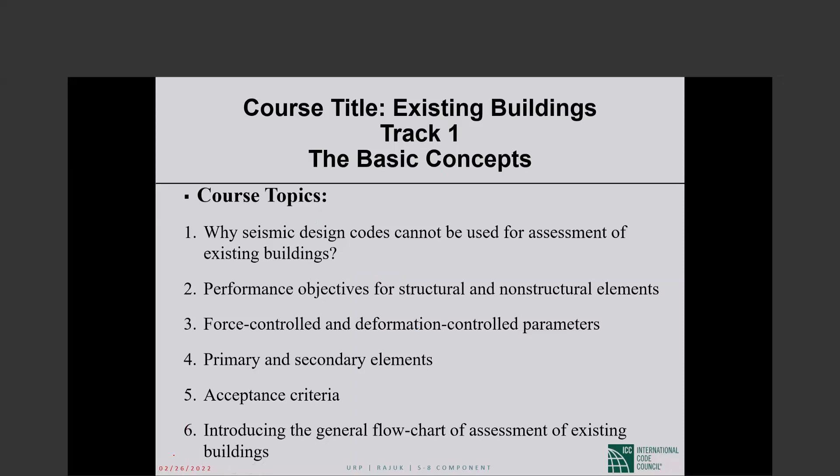First of all, again, I'm sorry that I will spend some of your time on material that all of you know. But as I said, it is very critical for us to find where exactly seismic design is separating from seismic evaluation. And then based on that, we can make our methodology for the evaluation and later for the retrofitting.

So if we look at the procedure for design of a building, what that means for us, or what we do in designing the building. Usually there are many elements in a building. We classify those members into load-bearing elements. Some of the load-bearing elements carry the gravity loads, vertical loads, some lateral loads. So these are the main point for us in design, designing these load-carrying elements.

Also, there are other elements in the building that we don't really depend on to carry the vertical or lateral load of the building. If they can carry the vertical and lateral load of themselves and be anchored, that is good enough for us. So in the design, mainly we look at the load-bearing elements. That's our main duty.

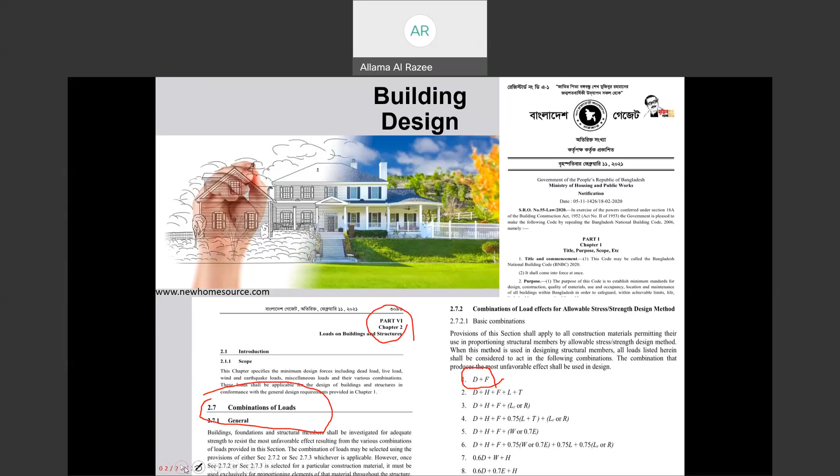Therefore, now that we have calculated the demands, now we want to design. What exactly do we design? When we say design this building, what is the design? What item are we designing? As I mentioned, in that specific beam, there are different response parameters and different force deformation.

For example, for the axial load, for the shear in the beam, for the bending moment, for torsions, we have the values of the load, the behavior that we want from each of these response parameters in building structural design. I emphasize building structural design because later I want to go through building seismic design.

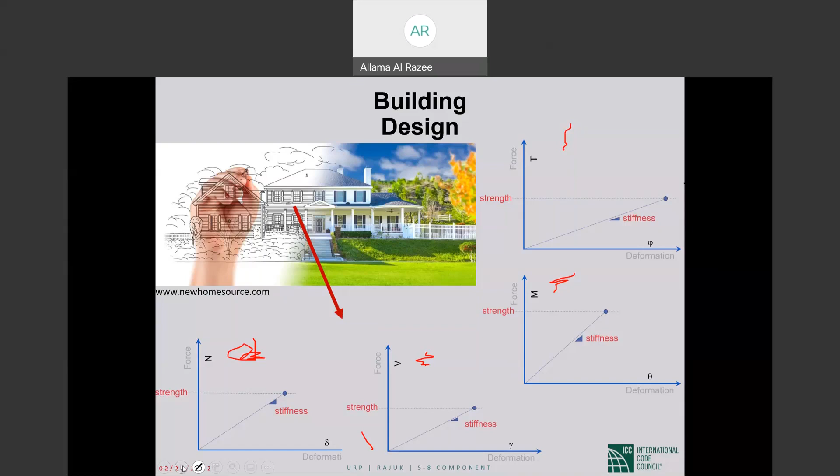Therefore, all our design focuses on how to provide a specific strength. So to conclude this part, in building structural design, we design for strength, or we design for force, because it's the vertical axis. And as we can see, for example, in BNBC, chapter 6 says strength design of reinforced concrete structures. So it clearly says that all the articles here give you the approach for how you can design an element to have a specific strength on the vertical axis.

Therefore, the load that causes this demand is not important. So in the steel code, in the concrete code, in the chapter on design for strength, we don't say whether it is under, for example, dead load or live load; whatever load causes this much demand, we should provide enough strength that exceeds that demand. So our design for buildings that don't get damaged is designed for strength, designed for force. Our design approach is force-based design. We design for force. All these articles are for designing the strength of the elements.

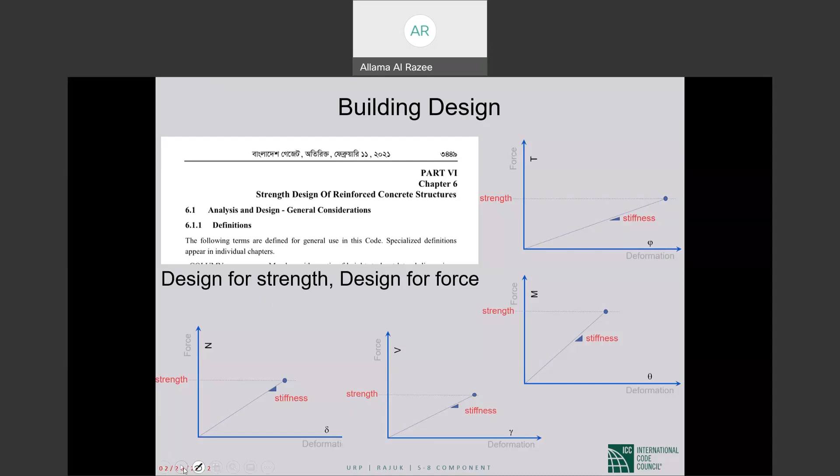Of course, as I mentioned, we design for strength and then check for stiffness. So, in a very short statement, for ordinary loads we expect the building before loading and after loading to remain the same, because the designer calculates the demands in all elements very precisely, and we have good codes so that for each element, each response parameter in that element can be designed in such a way that the capacity, the strength of the response parameter, is more than the applied demand.

So in all the design codes, again emphasizing, it is strength-based design. Okay. But if I can go to the next page.

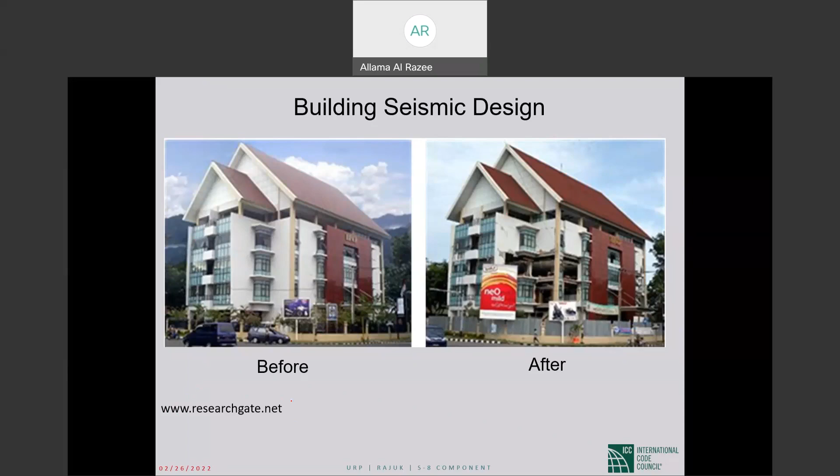And to be sure, these are referenced in the code. I know that you had courses on both the structural design part and the seismic part, but again, because I need them later, as talked about before, we have chapter 6, for example, for reinforced concrete strength design, and all the items there are for designing under ordinary loads, in a way that the building remains undamaged.

But then we have section 2.5 on earthquake loads, and then 2.5.2 earthquake resistant design, and the bad news is stated there. It says that the purpose of the earthquake resistant design provisions in the code is to provide guidelines for design and construction of new structures, still you are in new structures, subjected to earthquake ground motion in order to minimize the risk to life. Minimize, not completely avoid, as we would expect in a building that doesn't get any damage.

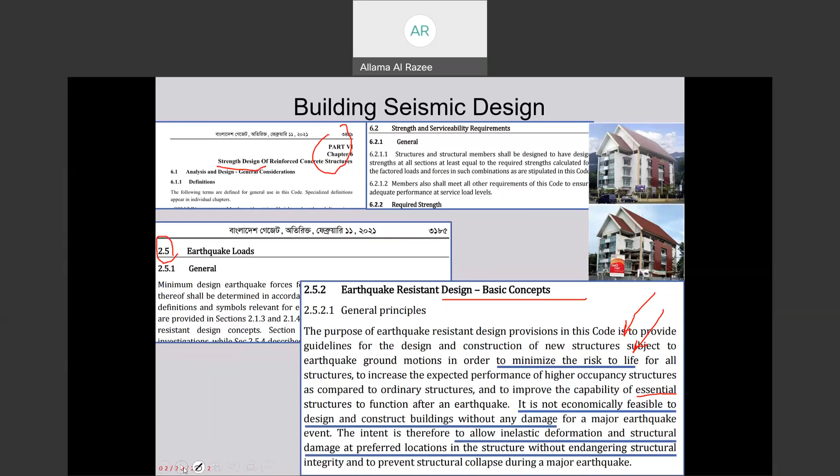So, one good thing that researchers usually do after earthquakes: because the earthquake happens, you have the earthquake ground motion record, and sometimes you have the specifications of the buildings, so you can model that and study what happened to this building.

For example, this is from a paper in a world conference assessing this 15-story building damage in one of the earthquakes in Chile in the year 2010. So a very nicely built building like this, after the earthquake, becomes this. For sure, the intent of the code is not this. The building in 2009 becoming like this in 2010 is not acceptable.

If everything is according to code, and this happens, and if the level of earthquake that happened is around the design level earthquake, then we should change something in our code. Because we accept damage, but, as it's mentioned here in the BNBC, we don't accept collapse, just damages. Integrity and also stability should remain. So these kinds of studies help us to improve the code.

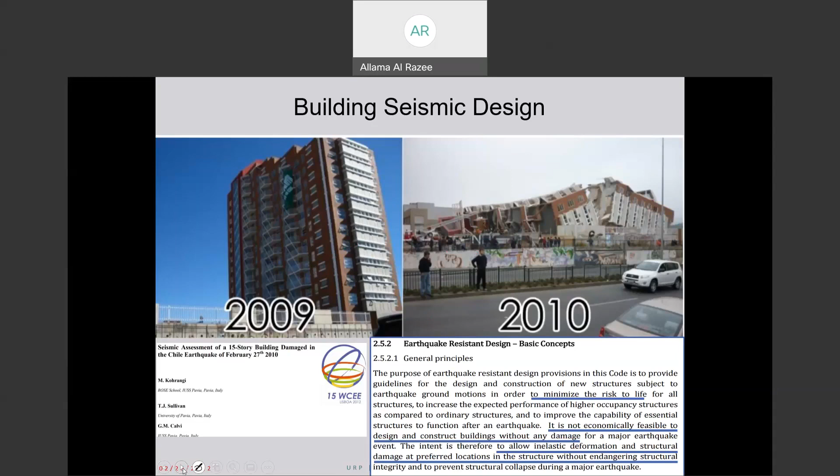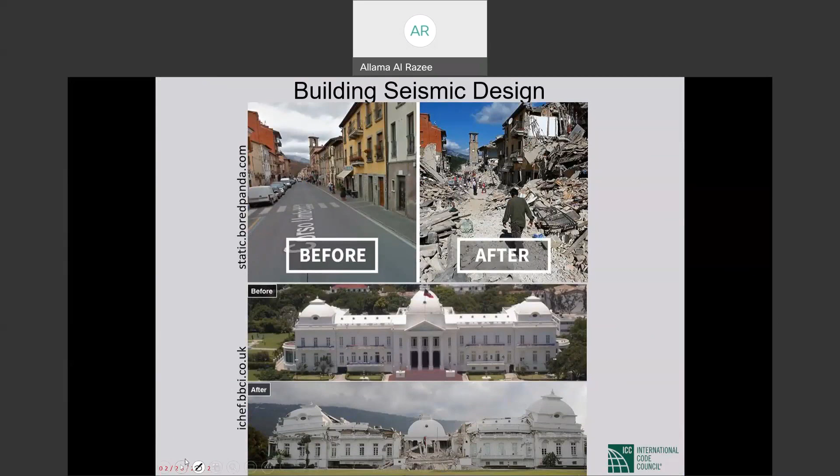But the main point is, this is not the behavior that we accept for buildings. When we say that we accept damage, we don't accept this kind of damage. Another example: here, again, these are not according to the code. Or if it is shown that they really designed them according to code, and this happened, then we look at the level of earthquake. If it is around the design level, then our design articles, approach and requirements need some modification. We don't accept losing stability or integrity.

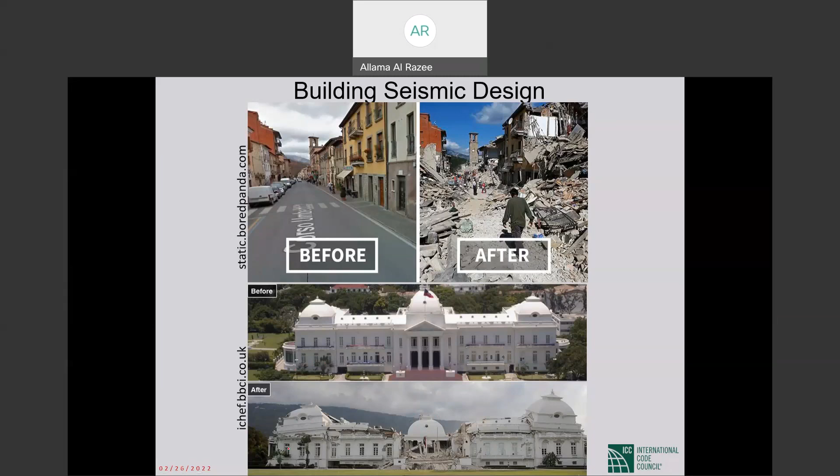Here, for example, in the bottom picture, the middle part, where the irregularity was more compared to the other part, got most of the damage. So we don't expect this much damage. It is not according to code, and if it is, the code needs changing the requirement. This one is also not the way that we accept as the intention of the code.

Usually in the previous versions of code, the penalty for irregularity was only a change of the method of modeling and analysis. Therefore, if you had a building with some kind of irregularity, previous codes let you go ahead, but you should use more sophisticated analytical methods. Instead of static analysis, you should do, for example, response spectrum analysis, dynamic analysis. But they don't limit you. They don't forbid you to design a building with irregularity.

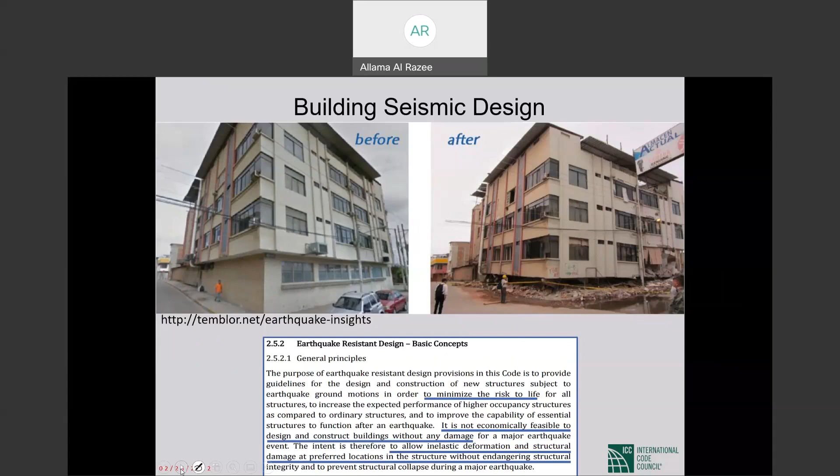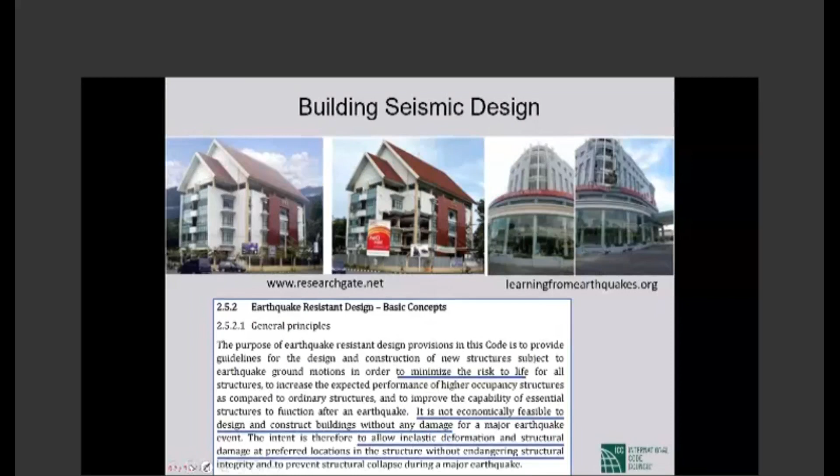Anyhow, this kind of damage, again, is not according to code. We don't accept this, and the code's intention is not like that. If this is designed with code and it does happen, it was not the intention, and they should modify the code provisions. For this building, it got damaged. There are lots of damages in the elements, and most probably this building will be demolished after this earthquake.

This one maybe can be taken care of with some retrofitting, but anyhow, these are the buildings that we, as structural experts, give to our clients. And after this earthquake, they don't believe us that we design according to code, because they thought that if the building is new and designed according to the new code, it shouldn't get damaged. But really, we are designing for damage. The way that we design, we expect this kind of damage.

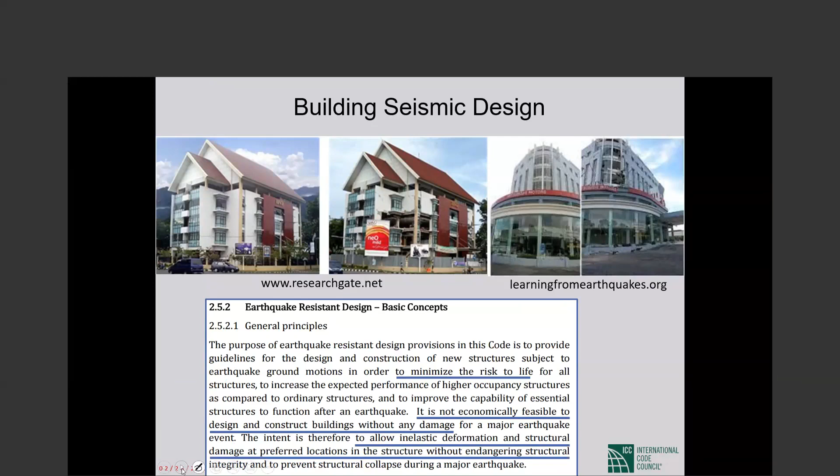So, okay, very good. Now, how can we handle this kind of very complex behavior in the new code, in our design for the new buildings? Then we can use the same approach for existing buildings. So there is really no need for an extra approach, extra code, extra course. What is the problem? Where is the problem? We should try to find the problem.

So again, the main question is, can we use the seismic design approach of the NBCC for assessment of existing buildings? We are using this approach, a very nice, very up-to-date code, for the new buildings on the left. For the new buildings, we model, we check the stress ratios. If there is a problem, we change the property of the element, solve it, and then we get the final design. No big deal, not much complicated stuff needed. And we are using such an advanced seismic design especially for these new complex buildings.

Then for existing buildings, for old ones, they should be much simpler. We shouldn't make it more complicated. But why is it that we make it so complicated for existing buildings, which are generally much simpler, older buildings compared to these new, complex, up-to-date buildings? Therefore, we should... oh, NBCC, I wrote it differently. So NBCC seismic design for assessment of a building, how it works.

How do we design for such complex behavior in this building, for example, lots of damage at different points, but it has a stable situation and its integrity almost remains? So how do we do that? Which complex software do we use to handle this kind of behavior? Where do we look at the inelastic deformation, how do we check if this inelastic deformation, which means damage, is endangering structural integrity or not?

During design, I can't see any location where we really model and check any damage, level of damage. No, everything was so simple: calculating a base shear, distributing it along the height, and using an elastic model and software, calculating the response parameters in the elements, and then we go to the code and design so that the strength is more than the demand. So where is this complex behavior that I have shown, where do we look at it?

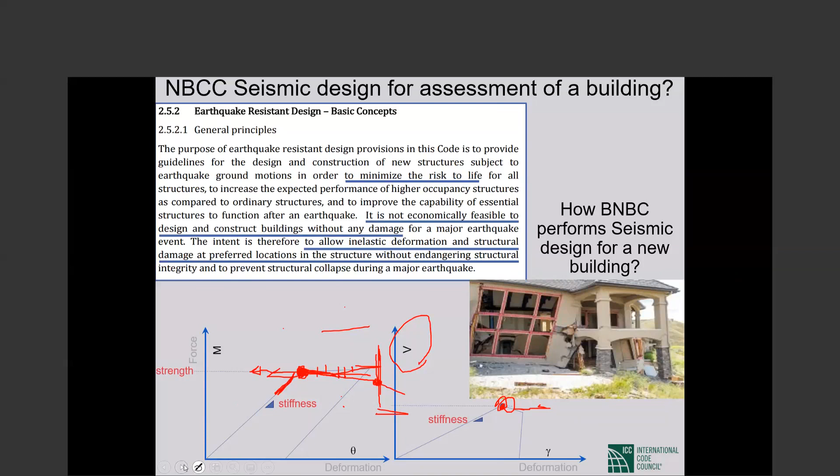see, if we want to design a new building for the earthquake, we should do nonlinear analysis, and for each response parameter see how much damage it gets and whether it is acceptable or not. But we don't do that. Without doing that, how do we design for earthquake? So that's the main point, the main parameter that we should look at more carefully to see where it causes problems when we want to apply this methodology for the existing buildings.

Go to BNBC. What do we do in the BNBC? In BNBC, we assume a level of earthquake, for example the acceleration for the earthquake with a return period of 475 years, modified by some coefficients. This acceleration multiplies by the mass. The G with the mass becomes weight. But anyhow, using Newton's second law we get the force. So everything is almost clear, a very easy approach.

We calculate the acceleration multiplied by the mass of the building, get the force that the building should withstand, and then we design the building for this. What exactly do we do? We calculate V, the base shear. We apply that in the load combination with other loads to the building. For each element, we calculate the maximum response parameter, and then we design. But when I say design, we design what? Design strength. The strength for this. And that's done.

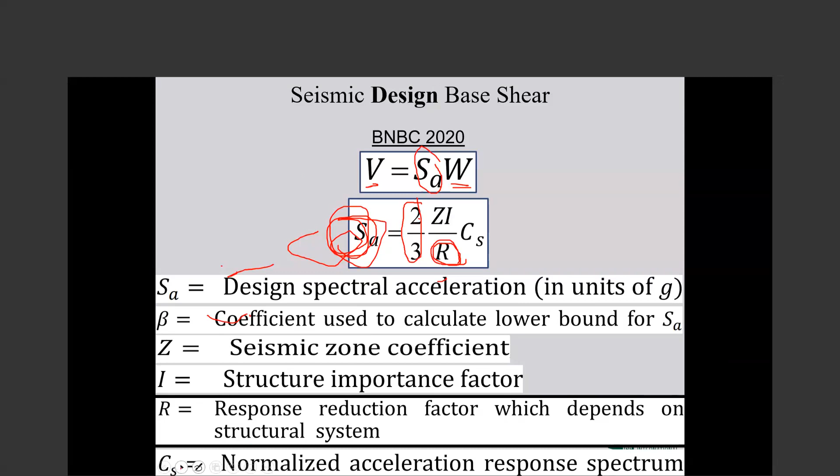We hide all the complexities in design requirements. For these R values, we calculated them based on the behavior of each lateral load system. We look at how much ductility each system has, and based on the ductility that the system can provide, we assign a specific value for R. If a system's capacity for ductility and damage before losing strength, integrity, or stability is less, we use less. And if it's more, we use more.

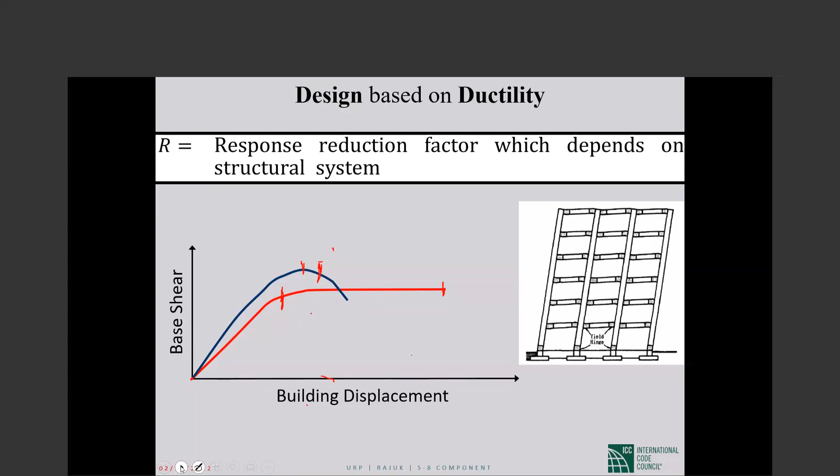So the relation between these concepts: we design for a smaller strength that we know causes damages. We know that it causes damages because we know that it is R times less than the level of the base shear for the design level earthquake. And a design level earthquake is just a 475-year return period earthquake.

It's not 1,000, 2,000, 3,000. It's just 475. So it's not a big deal. But again, even for that, we divide the base shear by R. 1/5, 1/7, 1/9, 1/10. So we reduce really drastically the amount of base shear. So we know that strength is much less than the applied load, and this gets damages.

Ductility is the capacity that with our design and detailing, we can make those damaged parts behave in such a way that they get damaged. The stiffness is zero, it is a mechanism, but it can handle some deformation, plastic deformation, without losing strength. This is the key word, without losing strength.

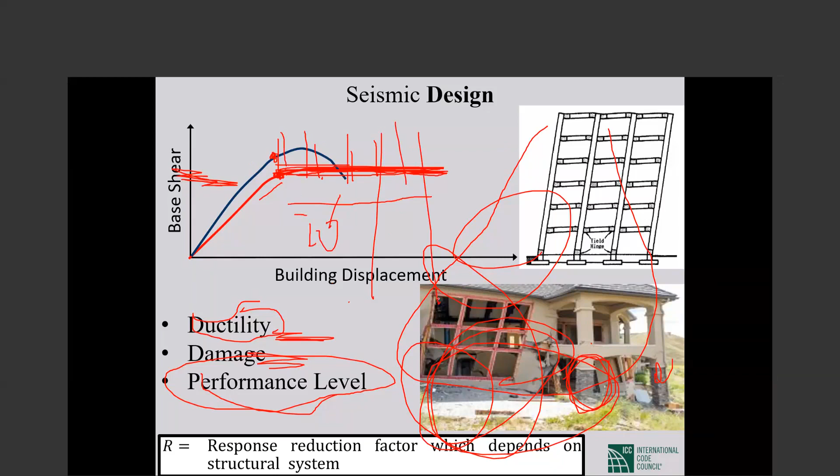So the relation between ductility, damage, and performance level is that they are directly connected and saying the same concept. So by assuming R in our formulation in BNBC, we accept that we need ductility, we will have damage, and the performance levels are not elastic performance levels anymore. The building will get damages. And this very difficult behavior is covered by design requirements, by a prescriptive design approach, and by detailing. We don't see that in the model.

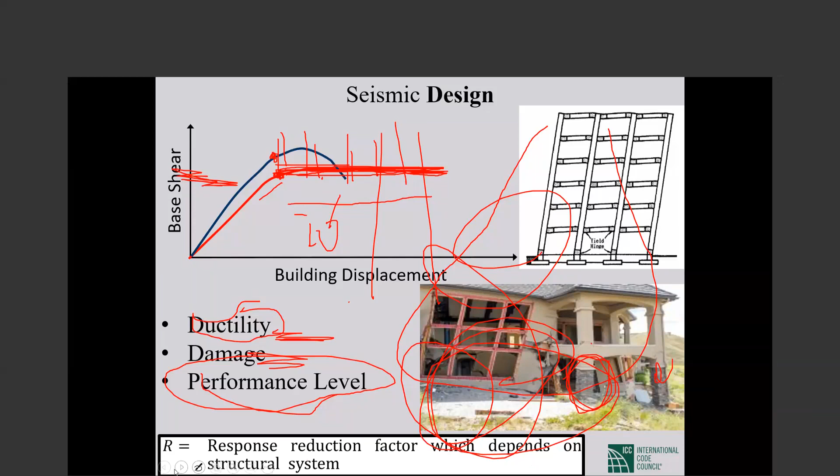And we will continue on this to reach the point that, unfortunately, for the third part, this approach is not working for existing buildings. And because of that, we need this course. Therefore, if we continue, as I mentioned, the vertical axis here is base shear, and the estimation of the base shear in the design level earthquake by BNBC is this value. That a 475-year return period earthquake will impose this much base shear.

But we can't build the buildings for this much, because for buildings in earthquake-prone zones, usually this value is too much. So it becomes very strong, very heavy, very costly buildings. So very easily we accept damage. In the calculation, we say, okay, put for this level of strength this much, or this much, for R1 or R2. But we know the consequences.

If you design it for R1, you should provide this much ductility capacity in the building. But if we consider that for all cases this is the level of deformation in buildings, which for many buildings is true, then if you design for R2, you should pay for it with much more detailing, because now the building has very small strength and very easily gets damaged. And you should provide lots of capacity in these points that get damaged.

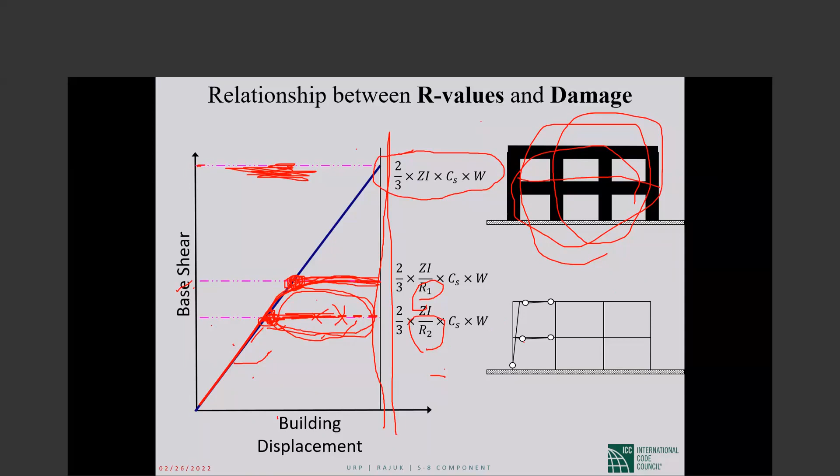It's not possible. Unfortunately, it's not possible. We need this course because there we didn't go through difficulty. We provide detailings that keep us out of the difficulties. All those non-linear behaviors here, we never see them in our design. Where are they? In that requirement.

Put, for example, the transverse reinforcement this way, the length between reinforcement like this around the column, the number of reinforcement should be like this. Many details, and all those details keep the difficulty and complexity away and handle those unwanted behaviors, especially local behaviors, that can happen and ruin our scenario.

So a very nice scenario. Depending on with what depth you can provide the detailing, you can have a larger R. If you can't impose this detailing on this site, you ask your designer to use a smaller R, because then you don't need that much ductility capacity. Therefore, that's the main point in our approach for new buildings.

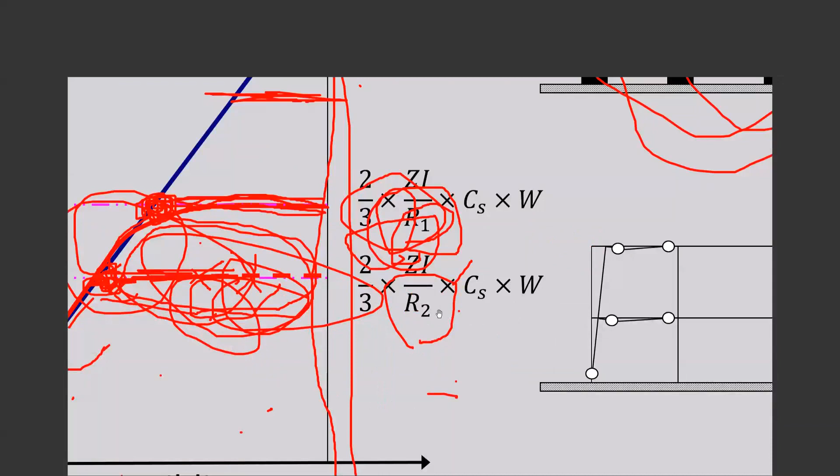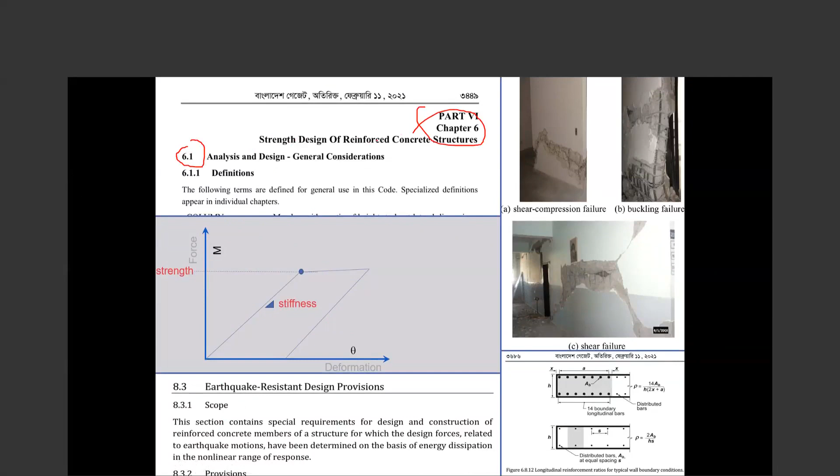What is this? Okay. That was in fact a very good thing. So, as a sample, if we want to check where those difficulties and complexities are high, in chapter 6 in general. No, sorry. Chapter 6 was strength design. Where are those complexities here? 8.3. Yeah, 8.3, earthquake resistant design provisions.

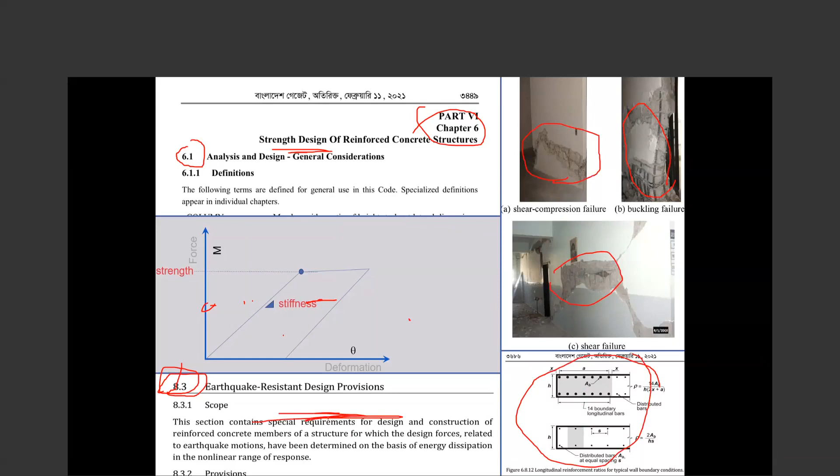Here you see detailings, lots of details. This building with shear walls that we are designing so nicely, simple, elastic, in SAP, in ETABS, very easily. We expect such a complicated behavior during earthquakes, but we don't model this behavior. We just use this detailing, these provisions in what we can call the ductility-providing chapters. You see, here it says earthquake resistant design.

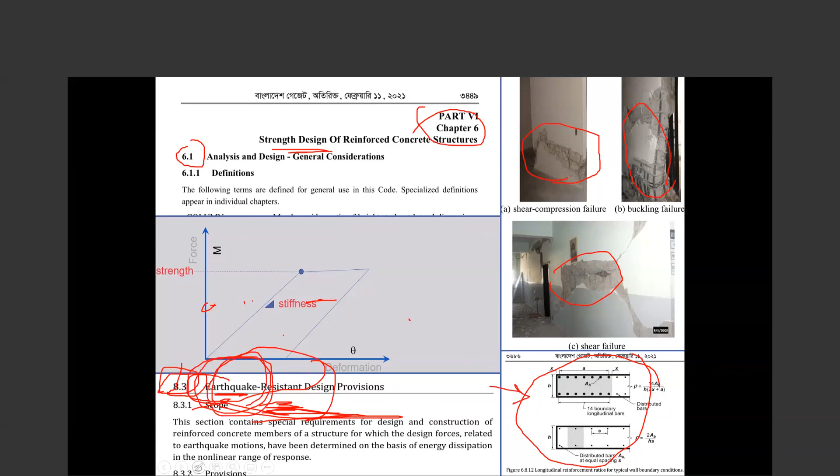The name of the loading is here. In the design code, we shouldn't name the load. What is the difference whether axial load is from dead load or from live load? We want to design this much strength. But here, we don't want strength. We want ductility. Therefore, for this specific loading that wants ductility, you don't check it in the modeling and analysis; by just applying them, you get the acceptance.

Therefore, to summarize, our earthquake resistant design for new buildings is two parts. One part is simple modeling and analysis. This is part one. Very easy, simple, elastic, linear. We put the load divided by R as a base shear and design the strengths. We know everything that we get is wrong. We know that is not the displacement, because the real displacement in the earthquake is more. Because of that, we always multiply the displacement we get from SAP or ETABS based on the system we are using.

But we are putting a smaller strength in the elements. We know that it causes damage. The second part, taking care of this damage, is not in modeling and analysis. We could ask that everybody who wants to design a building for earthquake should use nonlinear analysis, because the behavior of a building in an earthquake is nonlinear and gets damaged. So you should model the building completely nonlinear and check that none of the response parameters in any of the elements passes the ductility limit of that element.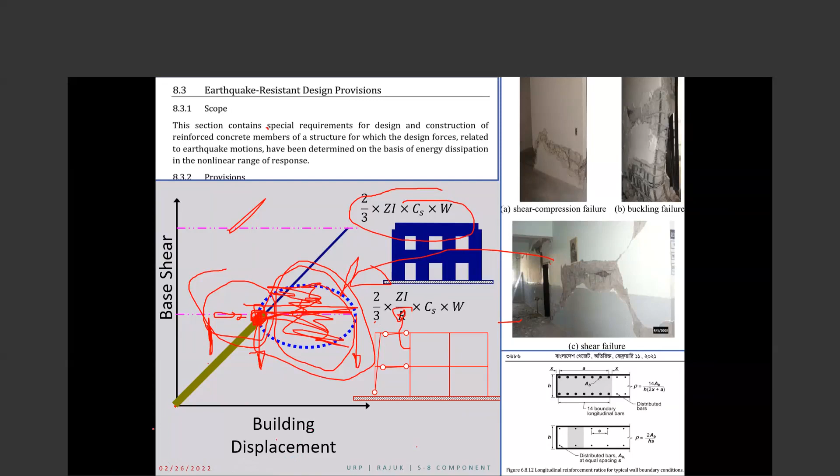That's true. Okay, so to summarize, the way that we design new buildings is with very easy approaches for the modeling and analysis. And then we have the...

Okay, let me, I have a message. We still have... oh, perfect. Very nice of Mr. Rudra. Yes, please give me feedback, because I put a system in front of me just to check my voice, and it disconnected. Perfect.

So, to give the general approach, very simple: in BNBC, we estimate the base shear. For design of existing buildings, tomorrow we will discuss how we calculate the base shear. Much simpler than BNBC. It's a couple of coefficients, and then again, Newton's second law, the same as here. Here, the coefficients seem much more difficult than there. So again, we do the same thing.

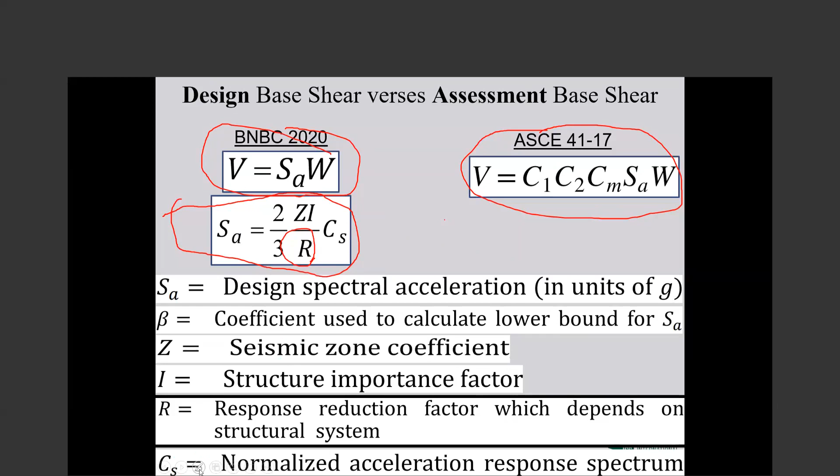I should also remind that when we say evaluation or assessment of the existing building, it's not always a very difficult job. All of you experienced structural engineers, you have lots of experience. You just go to a building, a concrete building, a masonry building, steel buildings. You can find many deficiencies and provide some detailing or advice to increase the seismic behavior of that building.

The easiest is just trying to reduce the weight of the building. Some of the floors, some of the slabs, some of the partitions. If you can reduce the weight, it will be reduced. So the evaluation and assessment of existing buildings is not always difficult. Just when we say the systematic way, it is more difficult. Otherwise, we have many methods.

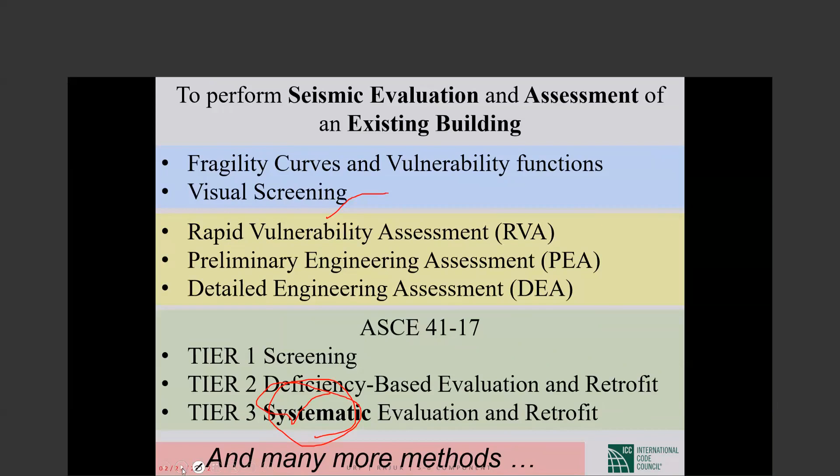That's the systematic evaluation. So when I say systematic evaluation, I repeat, I mean this: that we want to check the performance of the building at different levels of earthquake, and come up with the result that it can pass the requirement of that performance level. This needs modeling.

Therefore, when it comes to earthquake consideration for buildings, we have a long history of codes and standards for new buildings, such as BNBC. Very up to date, very good. For existing buildings, it is during these 10 years that it has mostly become, as you see in the world, like a standard.

Before it was pre-standard, it was some recommendation. But buildings that experience damage are even more difficult to model, because from the cracks, from the residual displacements, you should see for each element how much you should reduce the stiffness of that element, how much you should reduce the strength of that specific response parameter, how much you should reduce the ductility capacity of this element because of the damage that is observed right now.

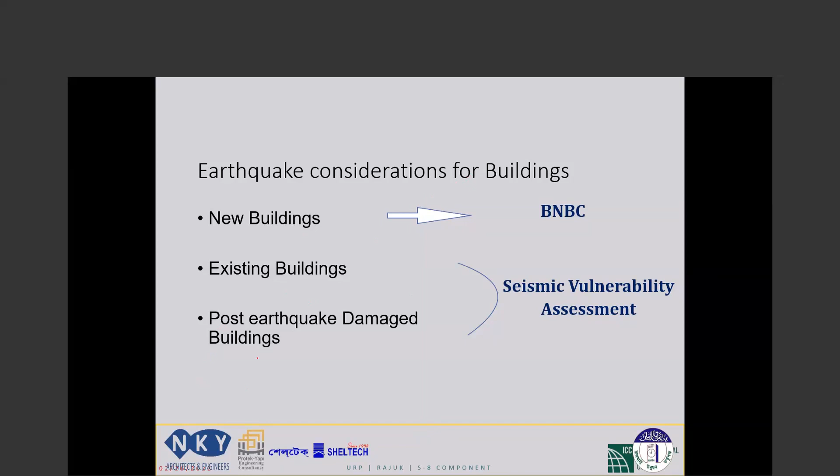And as far as I know, we don't have a standard or code for post-earthquake damage. We have a few very good reports, but not a code. So for new buildings, we have a history of engineering. Existing buildings are much newer for systematic evaluation. For post-earthquake damaged buildings, we are still a little far from a systematic approach.

So for this systematic approach, which sometimes is called DEA, detailed engineering assessment or detailed engineering analysis, and sometimes comes in ASCE 41 as systematic evaluation and retrofit, there are some concepts that are needed. We should be able to consider different levels of earthquakes, and we should have different levels of damage. We call them different levels of performance.

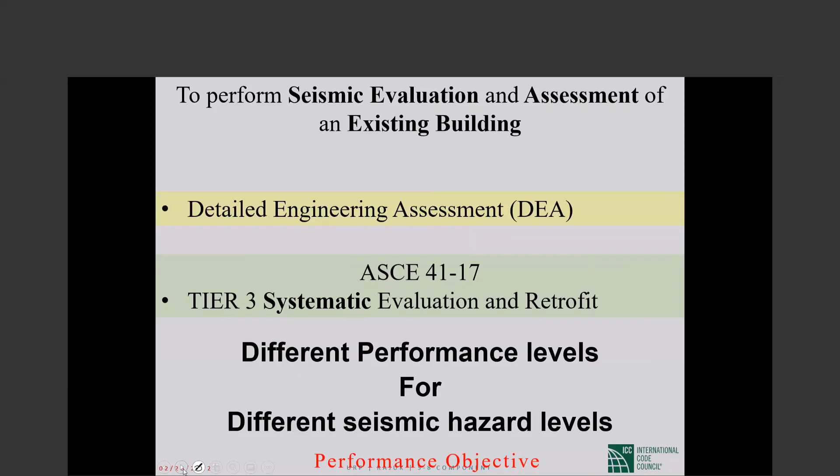Whatever they ask us, we can check. If they say, check this building for this level of earthquake, for example a 100-year return period earthquake, for this level of performance, we should be able to. If they say a much longer return period earthquake, for another level of performance, we should be able to do that. So this performance-based evaluation is the main structure of this approach.

Generally, in the new codes like BNBC, we don't have that. Everything is set and fixed: a specific level of earthquake and a specific level of performance. As we read in the text of the BNBC, it says we try to design a building that doesn't cause the death of people. So it's a specific performance level, something between life safety and collapse prevention, and for a specific level of earthquake.

For the earthquake with a return period of 475 years, or as mentioned here, 10% in 50 years, because we usually assume a building can last 50 years. So there is a 10% probability that this building experiences a larger earthquake than what we are designing for. 10% is too much, but that's the approach.

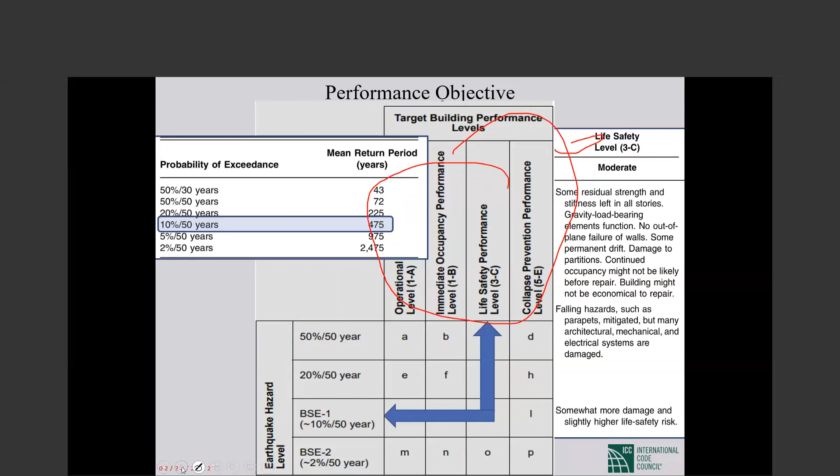So it's very important that for life safety, gravity load bearing elements shouldn't fail. No out of plane failure, some permanent drift, damage to partitions. This gives you a sense of what we expect when we go to the building after an earthquake. But then we have specific engineering demand parameters that quantify this life safety. This is the overview of the damage, but we need the quantification, and the quantification is acceptance criteria, such as the M factor that I mentioned instead of the R factor.

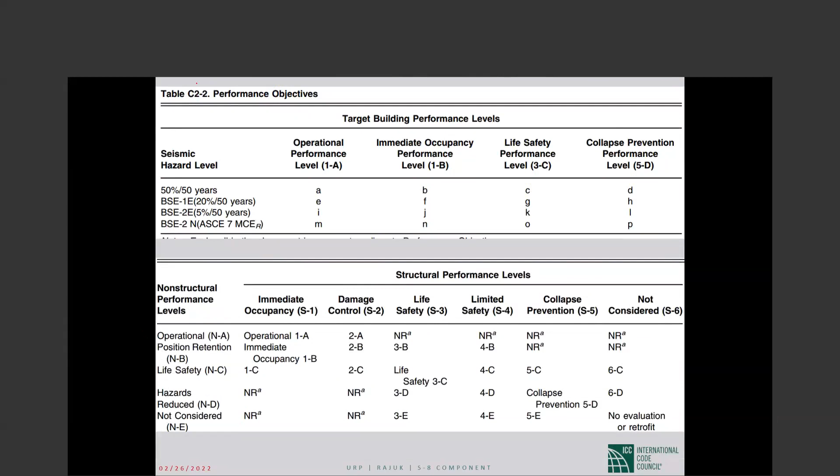So one important part of this systematic existing building evaluation is the discussion about performance objectives. Many times the people who use a building, when they want to retrofit it, have very unrealistic ideas, that it behaves very well under very large earthquakes. The retrofitting can be provided, but it will be very costly. So the consultant should explain the consequence of selecting each performance objective. When you say that for this earthquake you want the immediate occupancy performance level, providing this performance level under larger earthquakes will be much more difficult.

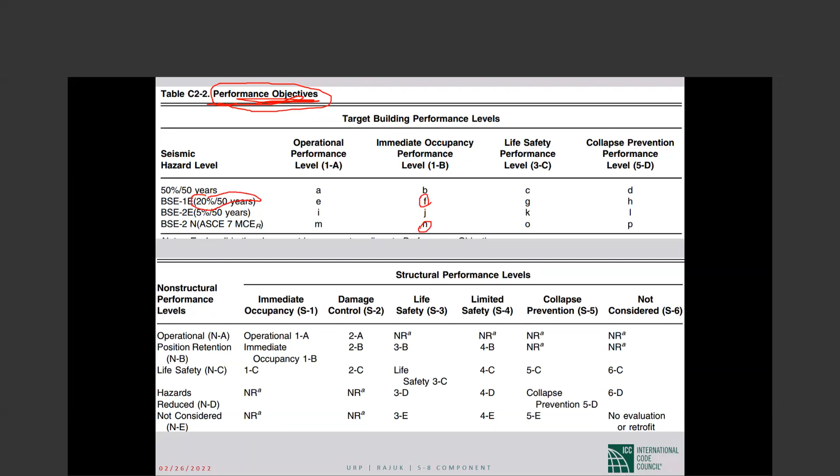And these target building performance levels have two components: one is structural, one is non-structural. So immediate occupancy performance level is 1-B: 1 is for the structural part, and B is for the non-structural part. Another table will show it. So it's very nicely separated what you want from the structure and from the non-structural elements at each level of earthquake. And sometimes some selections are not recommended, especially for non-structural elements.

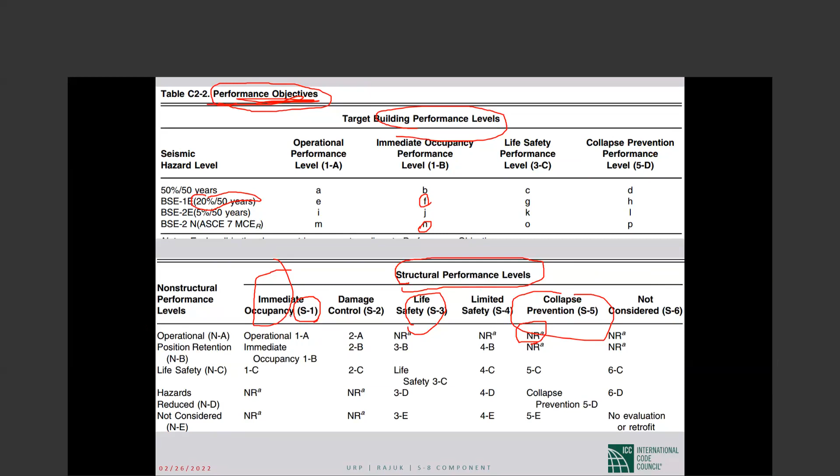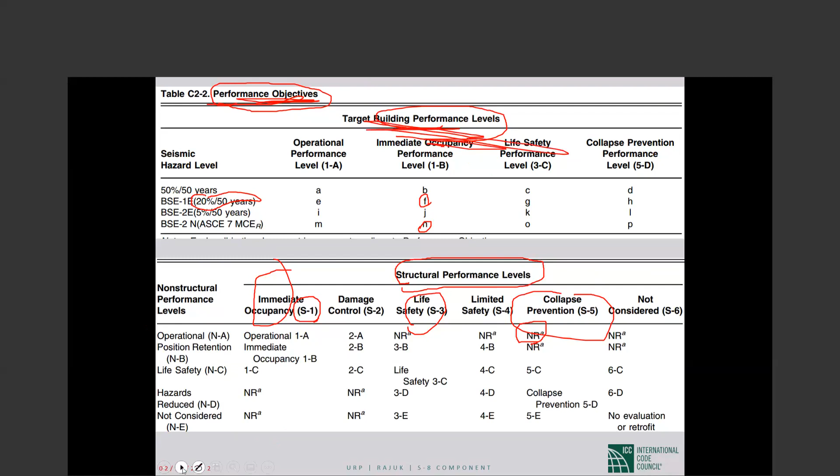So the structural performance level means how much damage you accept. IO, immediate occupancy, means less damage. Life safety means more damage than immediate occupancy, but less damage than collapse prevention. So each selection has a cost tag and a consequence tag, and the owner, the client, should look at both sides and select the most proper one for this building. So for the target performance level for the building, the structural part, the same thing is here. So, structural performance level.

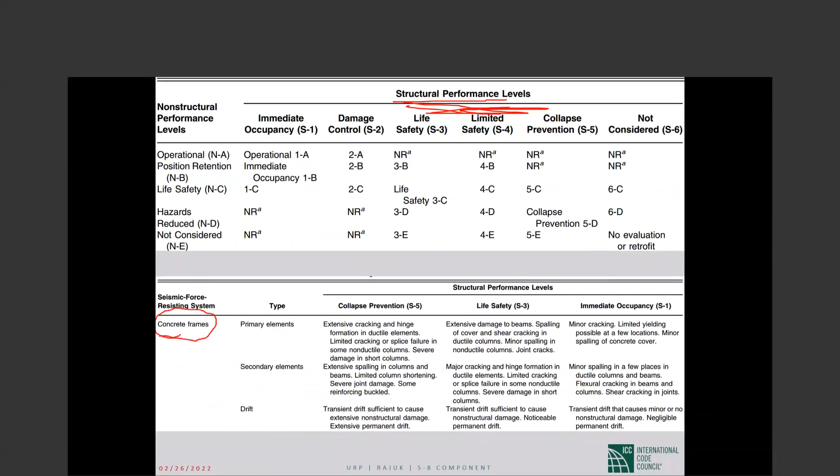Here I copy-pasted the concepts for structural performance levels; it's the same table as the previous slide. For example, for a concrete frame, when we say collapse prevention, what that means for the primary elements that carry the lateral load, for elements that just carry the gravity load, and from the drift point of view, what collapse prevention means.

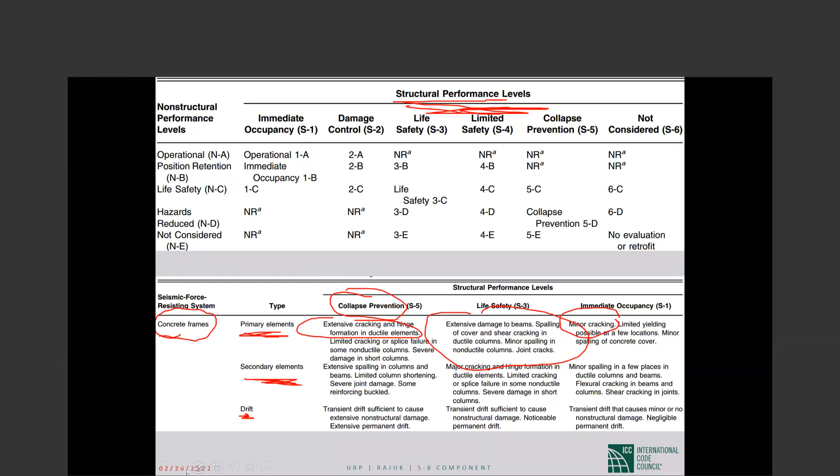When we say life safety, what it means for a concrete frame: extensive damage to beams, spalling of cover and shear cracking in ductile columns. But here, in immediate occupancy, minor. But in collapse, extensive. So here everything is very general, but then it will be quantified with the numbers and the tables, both for the linear analysis tomorrow and for the nonlinear analysis Tuesday. But here it gives a sense of what each performance level means, how much damage we expect.

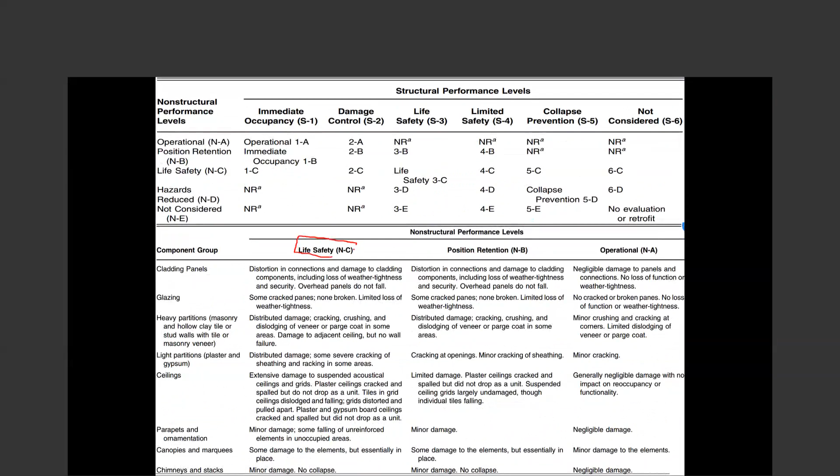And for non-structural elements, again, every version of the code changes the definitions. Before, for example, it was life safety, immediate occupancy and operational. Now we don't have immediate occupancy, we call it position retention, because for non-structural elements, first it is important that they don't cause fatalities, because many of the fatalities in earthquakes are because of failure of, for example, infill walls. So non-structural elements can cause lots of problems for life safety.

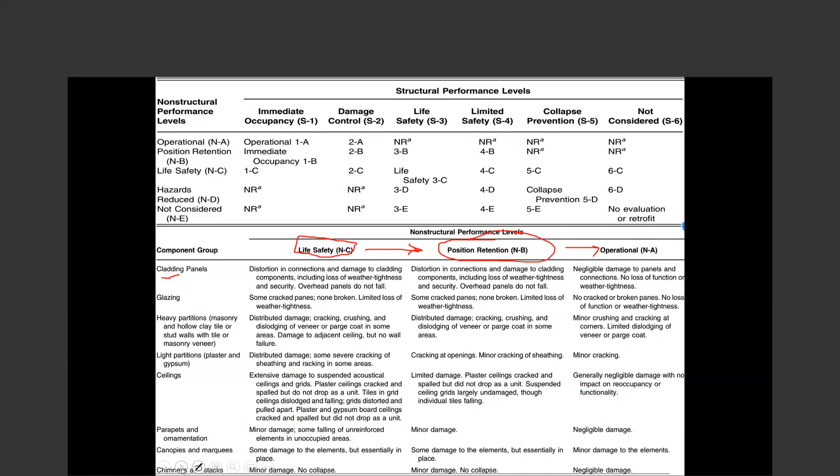Then maybe we ask that these elements should stay at their position, which is a higher level, and even more if we want them to function after the earthquake without much repair. So for everything, for cladding, for the chimneys, it explains the different levels of performance, what their meaning is in terms of the state of damage we expect, and then we will quantify them with numbers.

So there is an important thing. As we said, there are lots and lots of approaches for the evaluation of existing buildings. Some are very simple. But when it comes to systematic evaluation and retrofit, we don't want any simplification, because simplification means overestimate. So it's very complex. We want it to be as complex as possible. We don't want anything to be simple.

So generally, for systematic evaluation, don't expect it to be simple. It's not like a design course. In a design course, we want it to be simple because a wide range of engineers in different areas of the country should apply it, so it should be simple, and we put all the complexity in those details. But here, no. For existing buildings, especially for systematic evaluation, there is no need for all engineers to be involved, because we want to be as cost effective as possible. So it should be very complex to use all the capacities of the building. I'll give you some samples of how it becomes.

The main thing is we divide. Every subject will be divided. For all load-bearing elements, we don't use the same approach. We call some of them primary, some secondary. For primary, the acceptance criteria are different than for secondary. Primary are those elements that we consider will carry most of the lateral load. Secondary are those that we expect mainly carry the gravity loads, but we don't want them involved in carrying the lateral load.

We have the same concept for new buildings too. When you design the building, most codes let you assume that all the frames in one direction are concrete moment resisting frames. But you as a designer can assume just these two at the perimeters are the lateral load resisting system, and the middle ones, for example, as secondary, for gravity load. The concept is there too, but here it is more highlighted. So we divide, and we deal with the primary in one way, with the secondary in another.

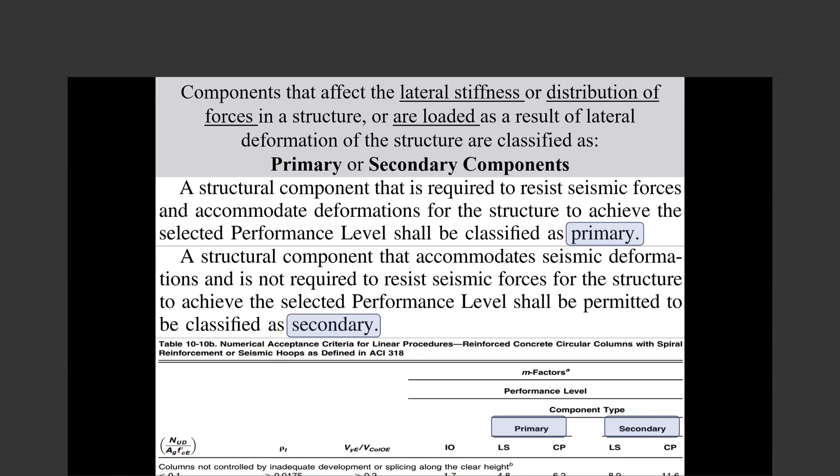For the parameters in the elements, as I mentioned, in a beam we have axial load, we have shear, we have bending, we have torsion. We divide them: some of them are deformation control, and some of them are force control. And based on that, how much ductility they can provide after reaching their strength. How much this A, for example, is, B,

on the deformation, how much plastic deformation they can carry after reaching yield without losing strength, and after losing strength, how much more they can carry with a residual strength. So very detailed, the numbers are here, but we divide. With deformation control we deal in one way, with force control in another way.

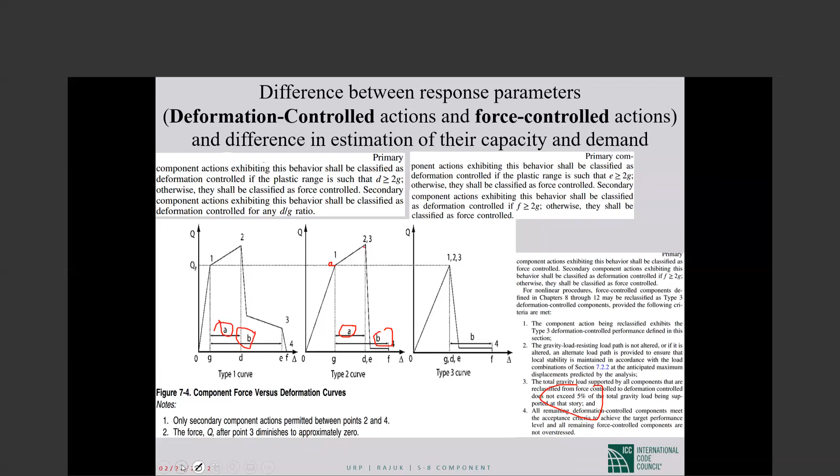That's the approach here. We try to divide as much as possible, to make our work as complex as possible, because it's engineering work; in the office, work is no problem. But the application of the retrofitting on the site, in a building that is working, is very difficult. That cost and disruption should be reduced. Very interesting, very interesting.

Here, for example, is concrete. This part is concrete. This is a beam, the same concrete. And as I said, for calculation of capacities, usually in the existing building codes we don't provide new formulas. When we want to estimate the strength of the element in shear, in axial load, the capacity of the element, we use the same formula from ACI, from the NBC, from whichever code we are familiar with. But the material property that we put in is different.

So this is a beam. We test it. They ask, what is the strength of concrete here? We say, what do you want it for? Do you want it for calculation of the force control strength or a deformation control strength? It is the same material, but for the parameters that are force control, we use the mean value minus 1 standard deviation.

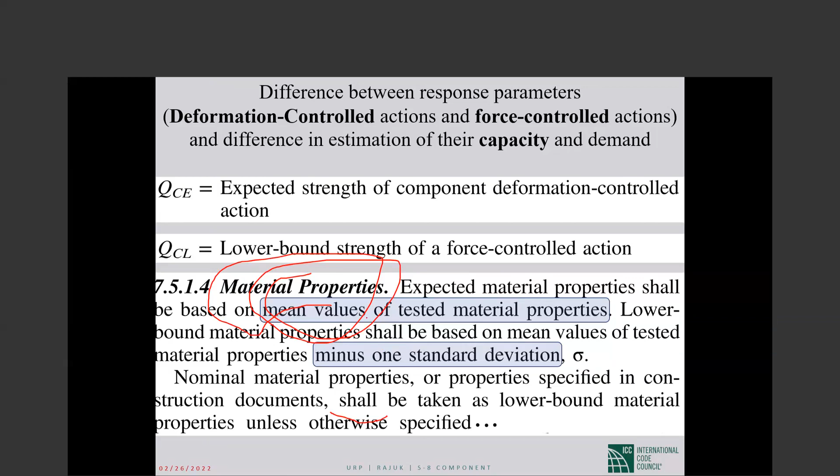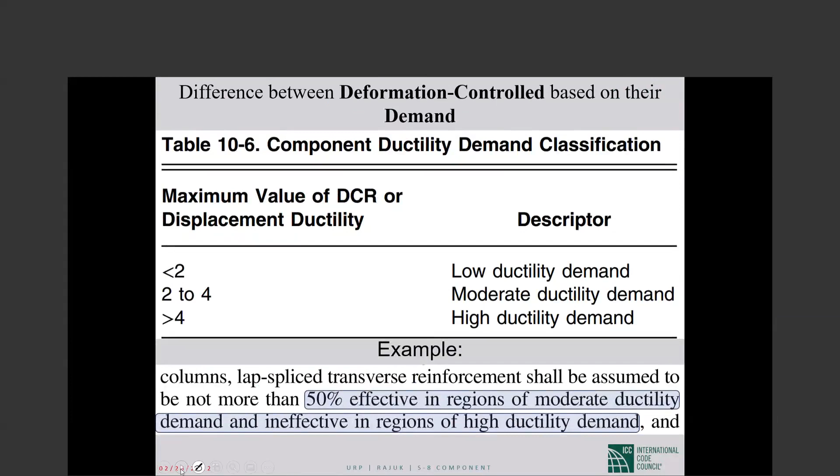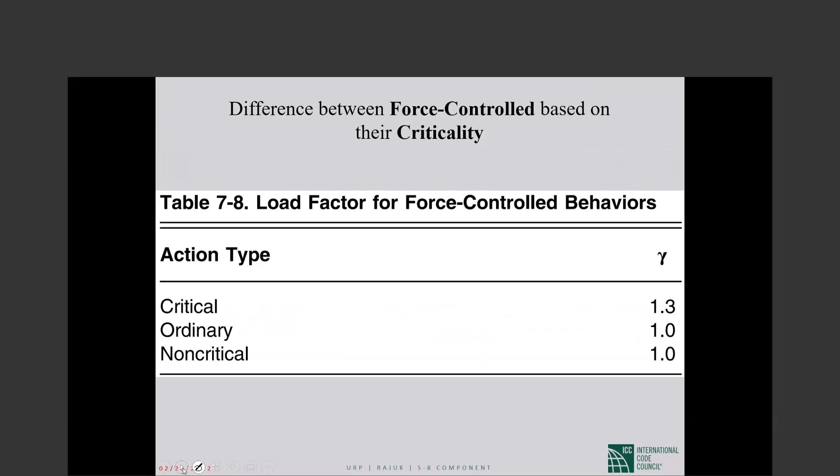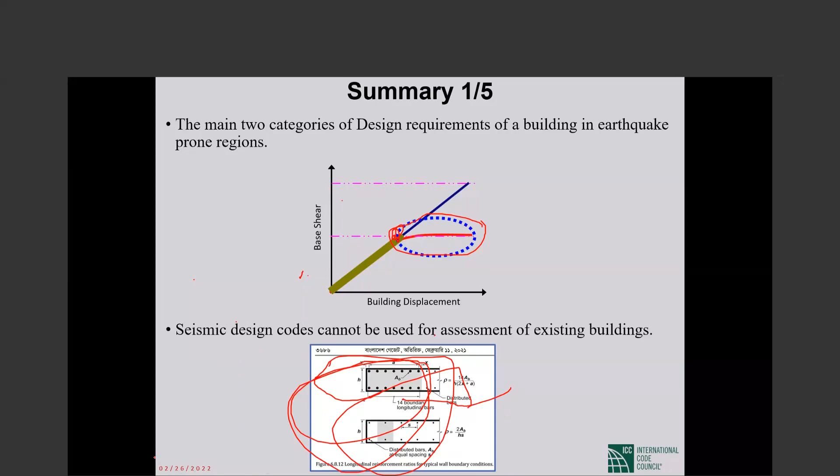And the main question of tonight: why can't seismic design codes be used for assessment of existing buildings? Because they don't have the needed detailing according to new codes. So you can use those approaches when they have the same good detailing. What does systematic evaluation mean? Systematic evaluation means that we should look at the different performance levels, different seismic assessments.

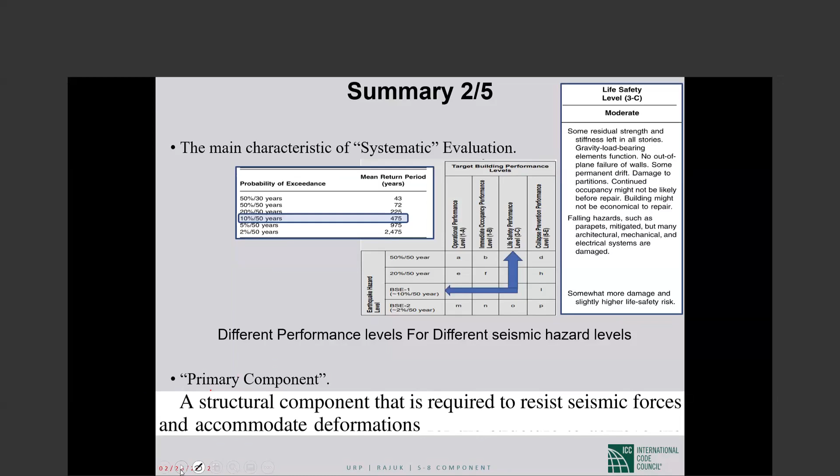What was the main characteristic of primary elements? Primary elements are the elements that we rely on to resist both seismic forces and seismic deformation. Deformation control, what is the difference with force control? The deformation controls are more ductile. Force controls are the ones that are brittle.

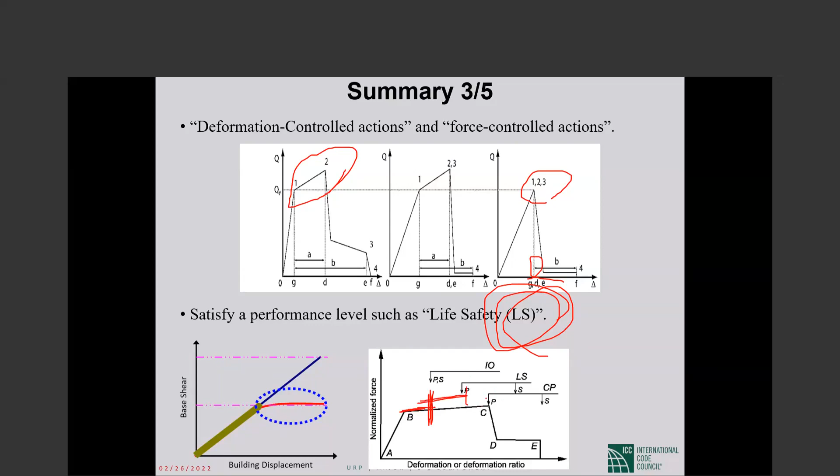What do the different performance levels mean? For example, life safety, what is that? You should feel the damage level. For example, we say this much damage, ductility means damage, this much damage is immediate occupancy. Life safety is more damage than immediate occupancy and less damage than collapse. So the performance is a sense of damage.

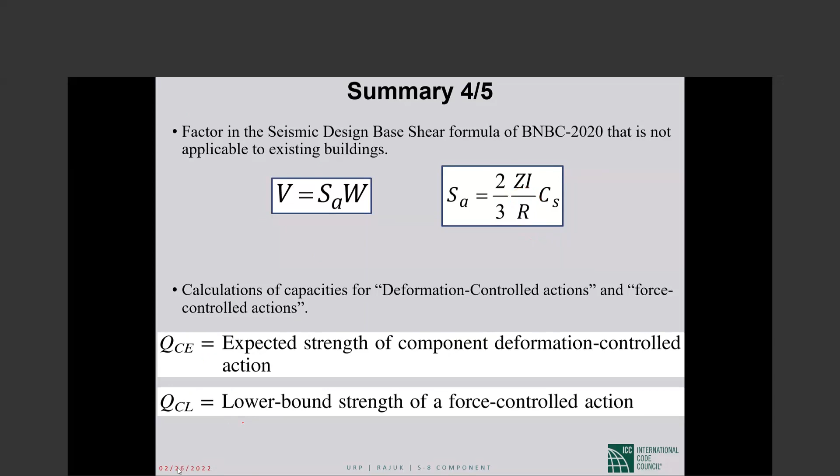Which one of the factors in base shear calculation of BNBC is not applicable to existing building? Of course, that's it. Calculation of capacities for deformation control and force control are different. Yes, that's the main approach. We want to make it complex. Even for the same material, for the brittle behavior, use lower bound. For the ductile behavior, bending for example, you use mean values. It's different from the lower bounds. Good.

And why is seismic assessment complicated? We don't simplify it. Why do we want it to be complicated? Why not just use an R? Because for existing buildings, if you want to use one number, it will be the lowest one. It becomes very uneconomical. It's very overestimated. So we don't want overestimation in our evaluation.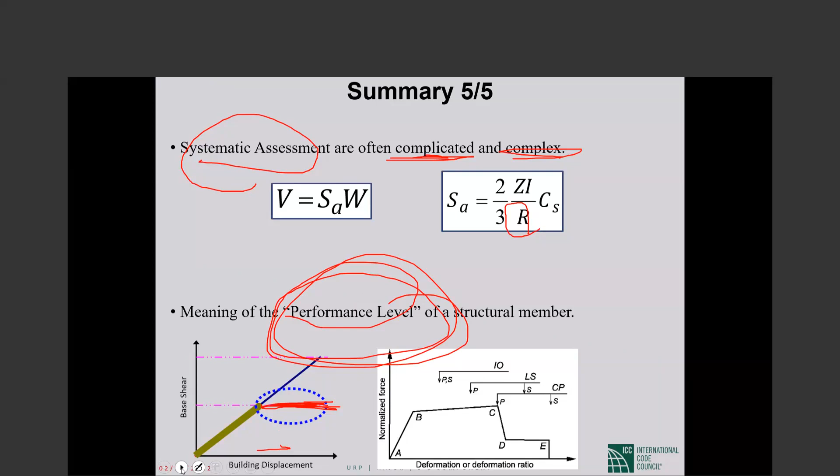What is the meaning of performance level? Performance level means damage. How much damage? The performance level means, more accurately, the acceptable damage for that level. So we have covered some very fundamental things. Generally, we know what systematic retrofitting of existing buildings means. We know now that

unfortunately, we need the course for existing buildings if we want to evaluate an existing building systematically, because new buildings hide the complexity in a place that we don't have access to. That is in new building detailing. They can inspect the building and be sure that the construction goes according to details. Not for existing buildings. None of the detailing is there. Different response parameters: some are force controlled, some are displacement controlled, some are brittle, some are ductile, and damage and performance are exactly the same thing.

And why is modeling the main issue in systematic assessment? In these 10, 15 years, the most important aspect and improvement was in modeling, because we want to model. It's not like seismic design, where we can use an R factor, finish it and go with elastic analysis. We should model all the deficiencies that a building has and bring those deficiencies into the modeling.

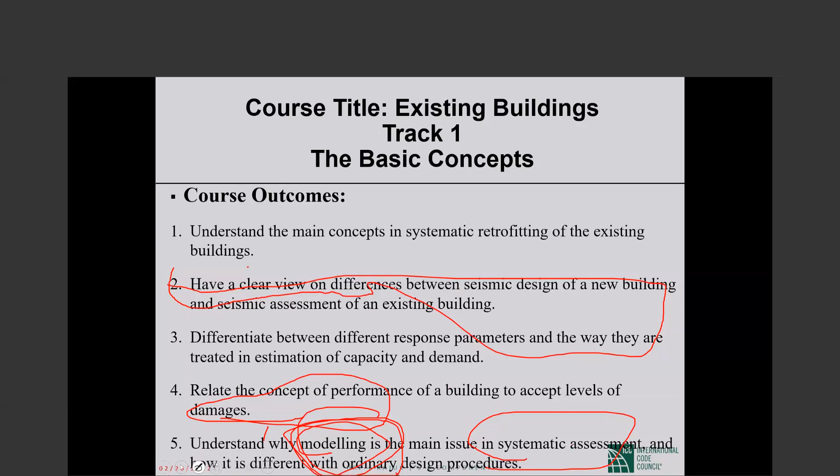Dr. Mogadam, can you hear me? Can you hear me? I think you cannot hear me right now. I don't have your voice. Just a moment. I think I should stop sharing. Let's see what happens. Oh, yes. Sorry, I was not able to hear at that point, but now I hear you. Oh, can you hear me now? Yes, perfectly. Okay, sorry.